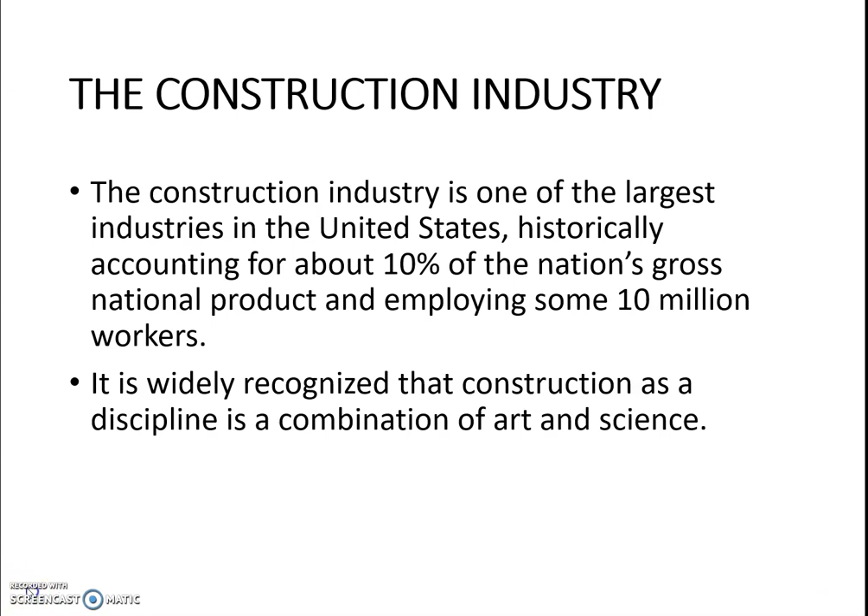So now let's talk about construction contractors. Companies and individuals engaged in the business of construction are commonly referred to as construction contractors because they operate under a contract arrangement with the owner.

Construction contractors may be classified as general contractors or specialty contractors. General contractors engage in a wide range of construction activities and execute most major construction projects. When they enter into a contract with an owner to provide complete construction services, they are called prime contractors.

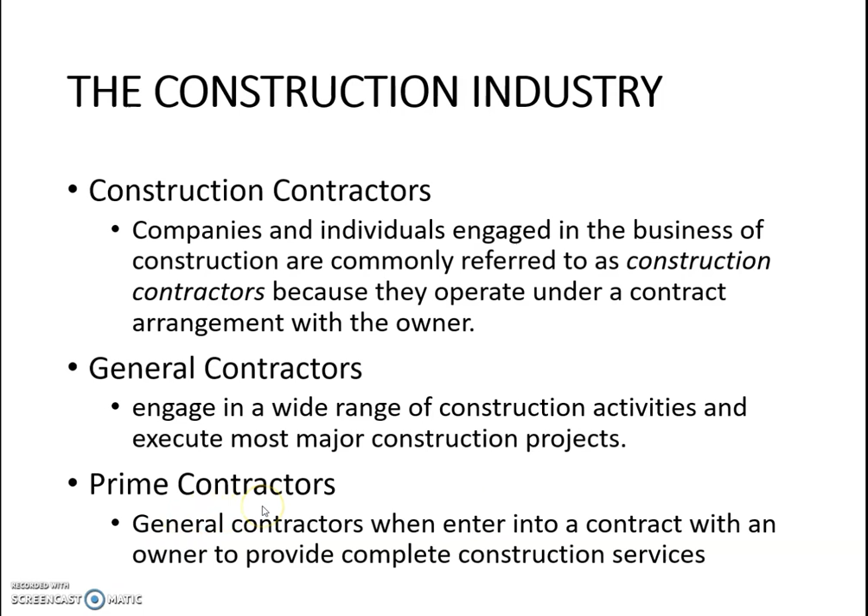Specialty contractors limit their activities to one or more construction specialties such as electrical work, plumbing, heating and ventilating, or earth moving. Specialty contractors are often employed by a prime contractor to accomplish some specific phase of a construction project. Since these specialty contractors are operating under subcontracts between themselves and the prime contractor, they are referred to as subcontractors.

Thus the terms subcontractor and prime contractor are defined by the contract arrangement involved, not by the work classification of the contractors themselves. This means that a specialty contractor employed by an owner to carry out a particular project might employ a general contractor to execute some phase of the project. In this situation, the specialty contractor becomes the prime contractor for the project, and the general contractor becomes the subcontractor.

The nature of the construction industry is such that there are a large number of small contractors in the industry. So many of the contractors in the industry are small in size.

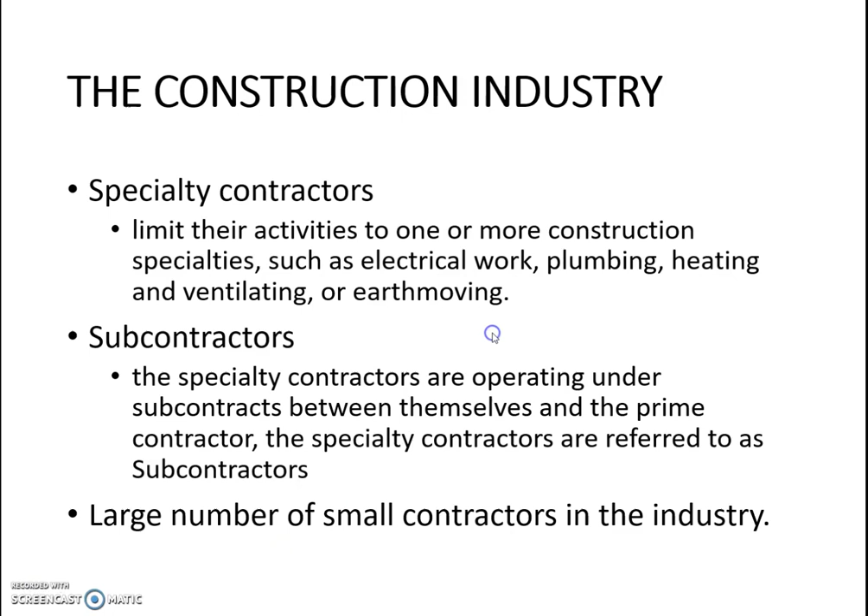Next we talk about the construction industry divisions. The major divisions of the construction industry consist of building construction, also called vertical construction, and heavy construction, which is also called horizontal construction.

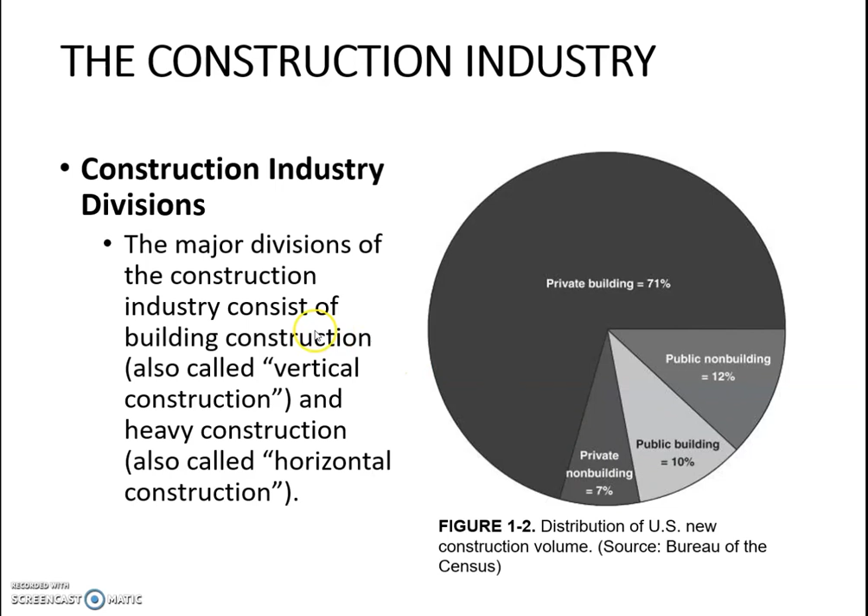So what are these building and non-building sectors? Building construction, as the name suggests, involves the construction of buildings. This category may be subdivided into public and private, as shown in the previous pie chart, with further subdivisions such as residential and non-residential buildings.

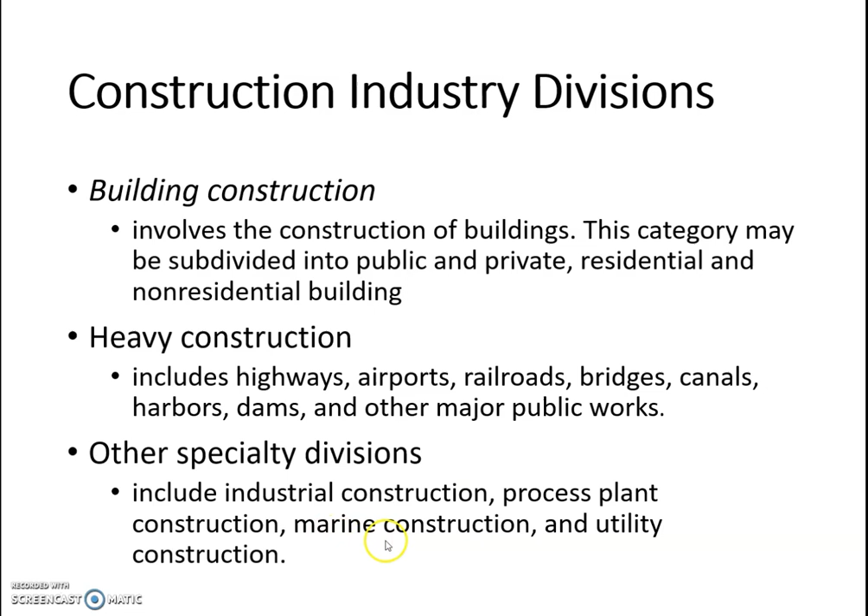In the non-building sector, we have the heavy construction and the other specialty divisions. Heavy construction includes highways, airports, railroads, bridges, canals, harbors, dams, and other major public works. Whereas the other specialty divisions include industrial construction, process plant construction, marine construction, and utility construction.

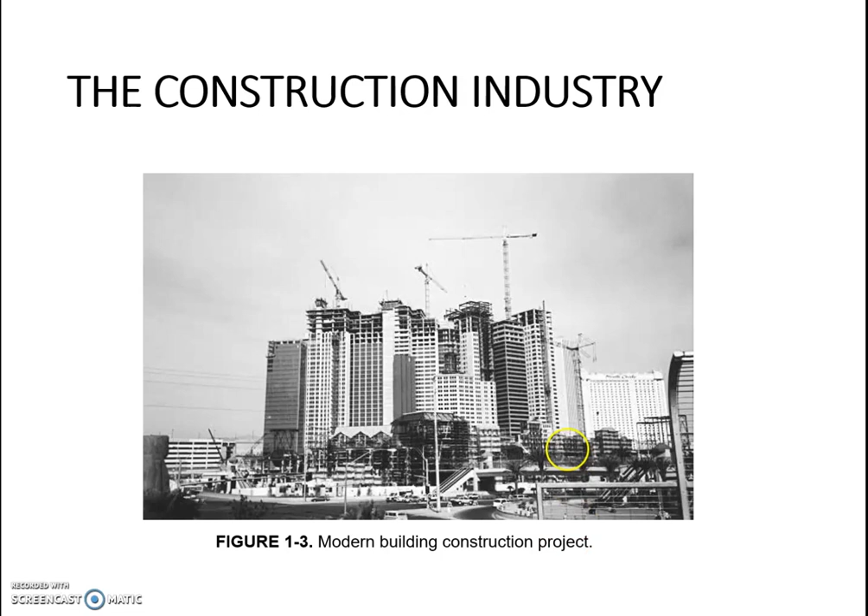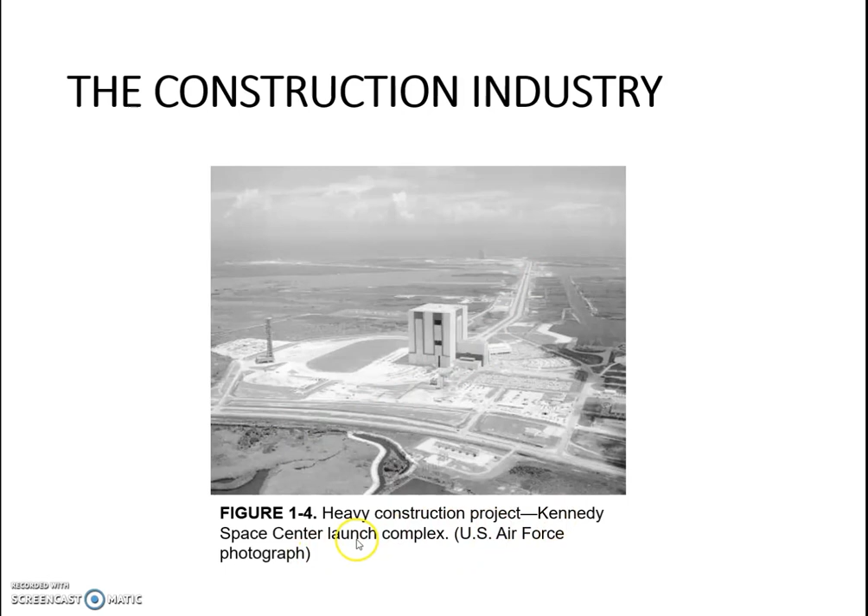Let's talk about the construction process, starting with project development and contract procedures. The major steps in the construction contracting procedure include bid solicitation, bid preparation, bid submission, contract award, and contract administration.

However, before the bidding process can take place, the owner must determine the requirements for the project and have the necessary plans, specifications, and other documents prepared. These activities make up the project development phase of construction.

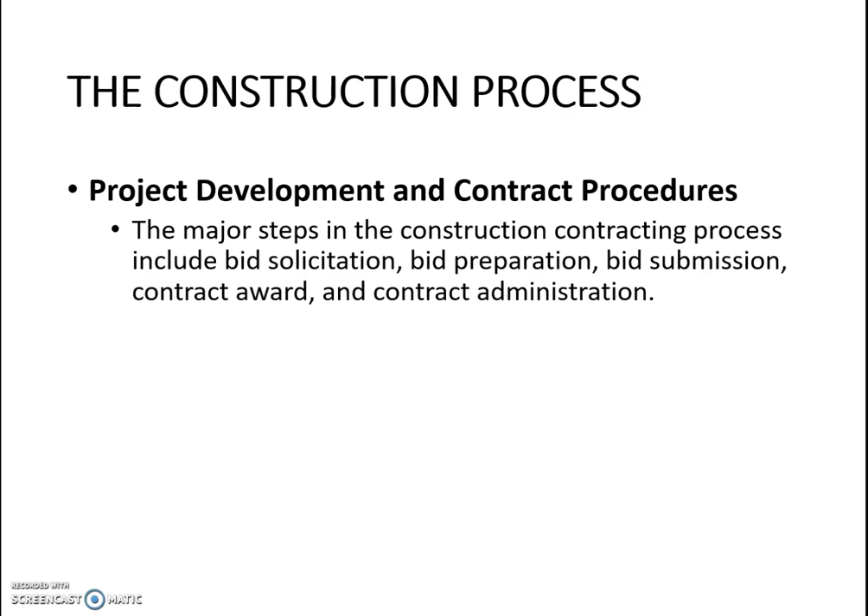For major projects, steps in the project development process include recognizing the need for the project, determining the technical and financial feasibility of the project, preparing detailed plans, specifications, and cost estimates for the project, and obtaining approval from regulatory agencies. This involves ascertaining compliance with zoning regulations, building codes, and environmental and other regulations.

On the other hand, for small projects, many of these steps may be accomplished on a very informal basis. However, for large or complex projects, this process may require years to complete.

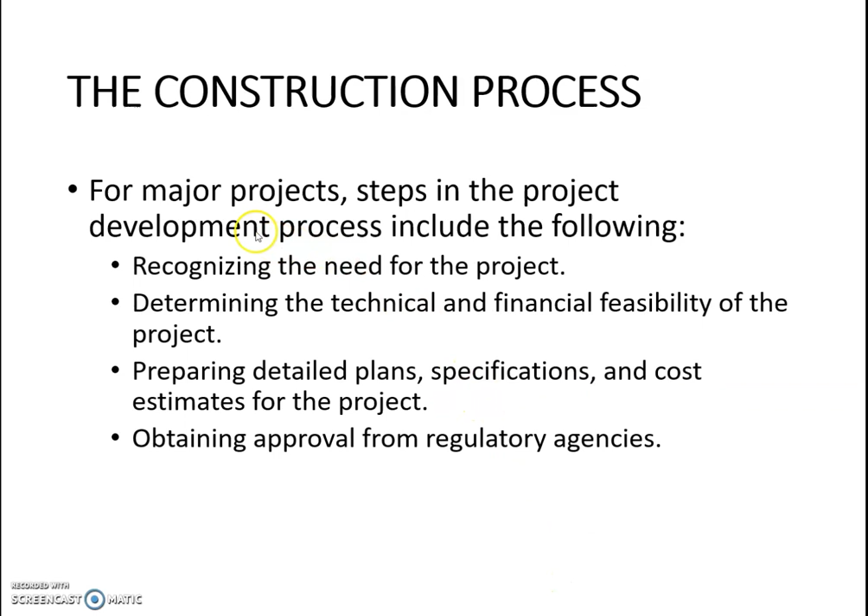Now let's see that after the development process, there is the construction. So how is this construction accomplished? The construction is accomplished based on several principal methods.

These methods are related to the situations when construction implies an owner construction force, then owner management of construction, construction by a general contractor, construction using a design build which is called a turnkey contract, and construction utilizing a construction management contract.

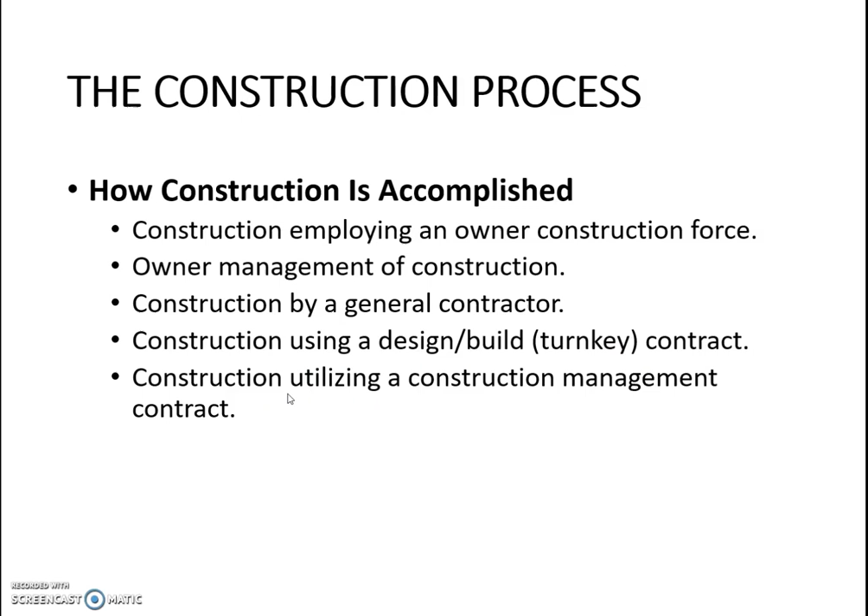Here we have some examples of these different methods. This is the one which is the construction implying the owner construction forces. In many large industrial organizations as well as a number of government agencies, they possess their own construction forces, and although these forces are utilized primarily for performing repair, maintenance and alteration works, they are often capable of undertaking new construction projects. This is how this system works as shown in figure 1.5.

More frequently, as shown in figure 1.6, owners utilize their construction staffs to manage their new construction. Here you have the construction staff, and under that we have the project director. So all of these are the owner's construction staff, and then they hire third parties to perform it.

In the first case, in figure 1.5, it is construction's own force which performs the work. But the only difference between figure 1.5 and figure 1.6 is that other parties are hired to perform the work in owner managed construction, whereas the work is performed by the owner's forces in this process.

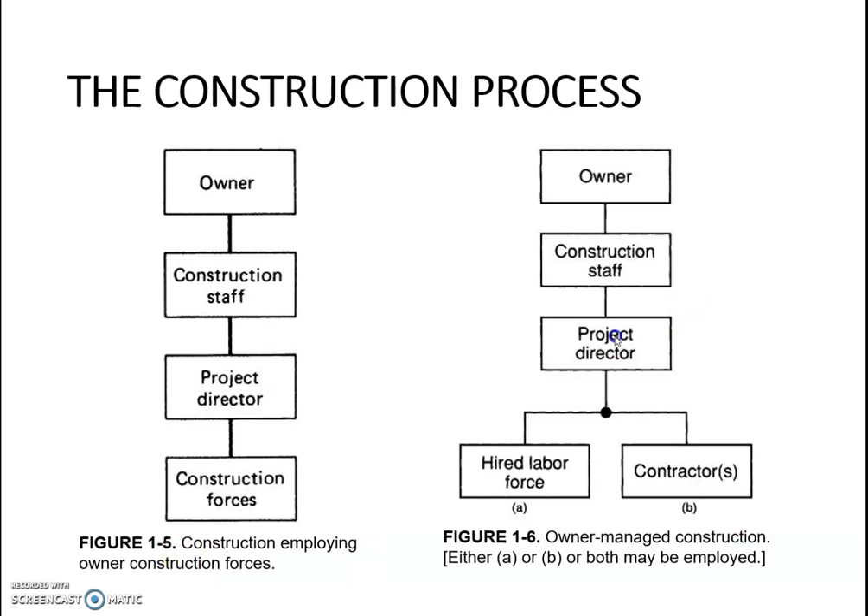There is another one, the construction by a general contractor. It operates under a prime contractor, and this prime contract is probably the most common method of having a facility constructed. So we have the owner, the owner has the contract with the design firm, the design firm inspects the work of the prime contractor, and the prime contractor hires several subcontractors, and in addition the contractor's own workforce also performs the work.

There are of course two newer methods of obtaining construction services, and these are finding increased use. These are called the design build method, or it is also called the turnkey method, and the other is called the construction management method.

Under this design-build or turnkey construction contract, an owner contracts with a firm to both design and build a facility meeting certain specified, usually performance-oriented requirements. Such contracts are frequently utilized by construction firms that specialize in a particular type of construction and possess standard designs which they modify to suit owners' needs. Since the same organization is both designing and building the facility, coordination problems are minimized and construction can begin before completion of final design.

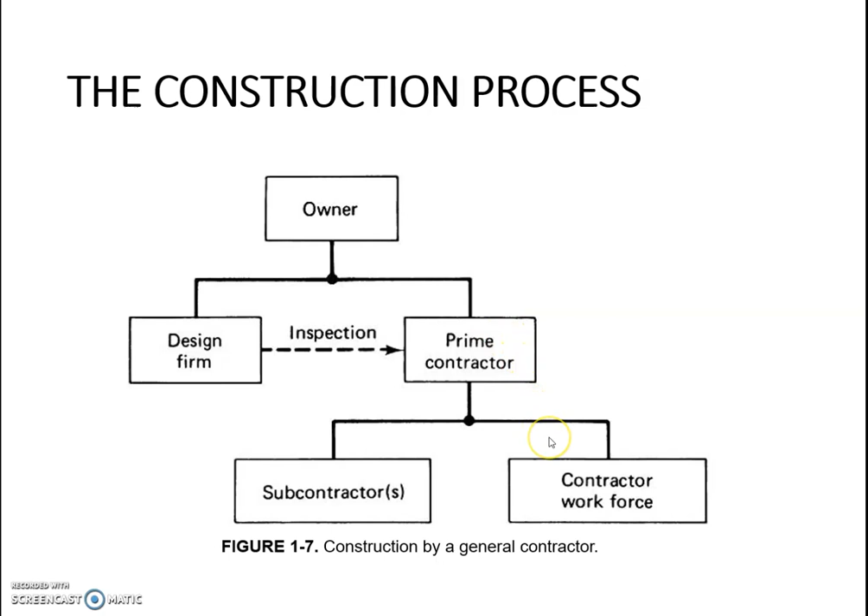Under the conventional construction process, it is also possible to begin construction before design has been completed. In this case, the construction contract is normally on a cost-reimbursable basis. This type of construction is referred to as fast track construction. Fast track construction and design-build construction are similar, but in fast track construction the arrangement of the parties is more like the traditional contractor arrangement. For example, construction by a general contractor performed so that design activity runs in parallel with construction activity is called fast track construction. However, in the design-build process, this is already included—design and construction take place in parallel with each other.

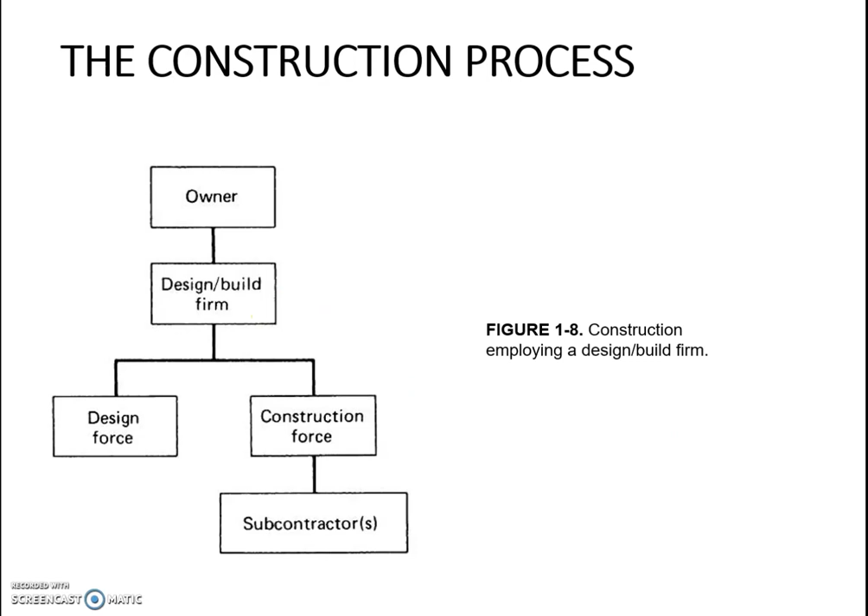In the last arrangement, construction of a facility utilizing a construction management contract is also somewhat different from the conventional construction process. Under the usual arrangement, also known as agency construction management, a professional construction manager acts as the owner's agent to direct both the design and construction of a facility. There are three separate contracts: one between the owner and the construction manager, one between the owner and the design firm, and one between the owner and the construction firm—three separate contracts for owner, design, construction, and construction management of the project.

This arrangement offers potential time and cost savings compared with the conventional procedure as a result of close coordination between design and construction. However, opponents of the method point out that the construction manager typically assumes little or no financial responsibility for the project, and that the cost of his or her services may be much higher than any savings resulting from improved coordination between design and construction.

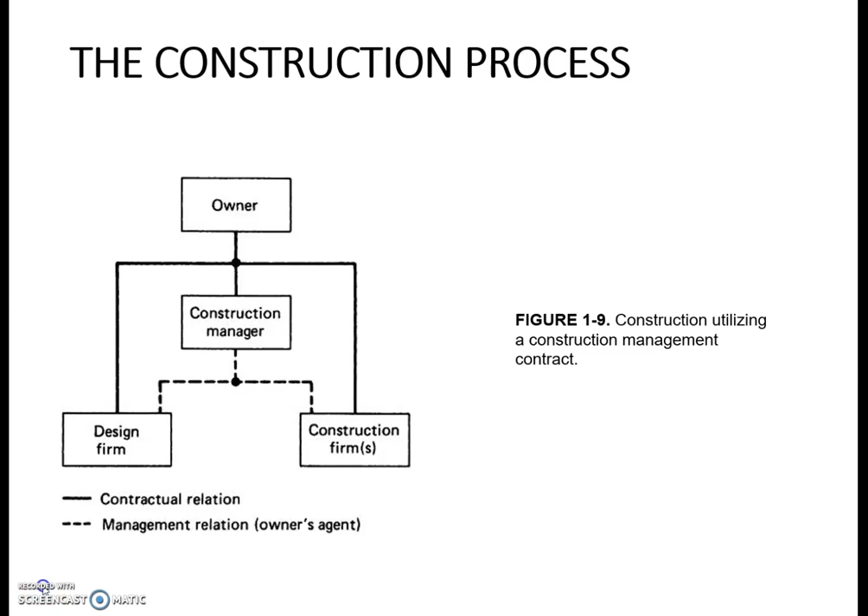Codes and regulations. Projects constructed in most areas of the United States or other countries must comply with a number of governmental regulations. These include building codes, zoning regulations, environmental regulations, and contractor licensing laws, among others.

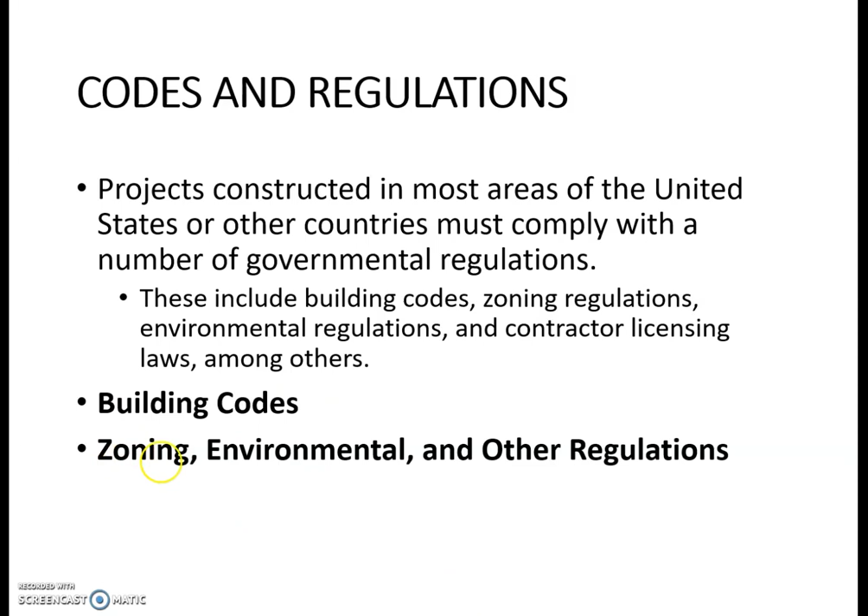Let's first discuss building codes and then zoning, environmental, and other regulations. Building codes are concerned primarily with public safety, providing minimum design and construction standards for structural and fire safety. As the name implies, such codes apply only to the construction of buildings.

In the United States, for example, there were initially three building codes: the Basic/National Building Code, the Uniform Building Code, and the Standard Building Code. Later, in 1994, these three model code groups jointly formed the International Code Council, which created the International Building Code. They also sometimes use the International Residential Code, which governs the construction of one- and two-family dwellings. In addition, there are plumbing codes, mechanical codes, and electrical codes by the International Code Council. However, for electrical purposes, the National Electrical Code, published by the National Fire Protection Association under the auspices of the American National Standards Institute, is mostly adopted.

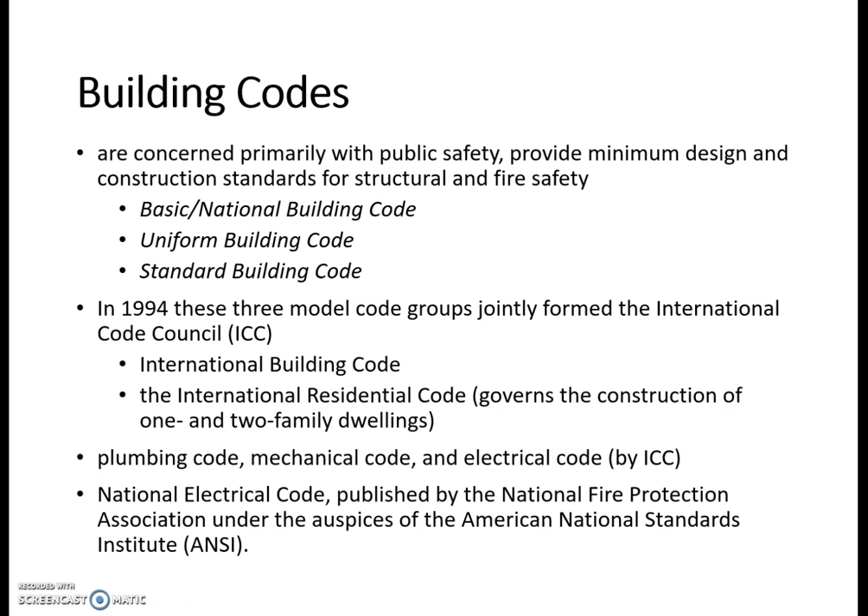Since the national model codes are purely advisory, a building code must be put into effect by local ordinance. While local building codes are usually based on the model codes, they often contain local modifications which may be unnecessarily restrictive. Such restrictions, along with delays in updating local codes, result in increased building costs. Another problem associated with building codes at the local level is the quality of code administration—the lack of an adequate number of technically qualified building officials often leads to cursory inspection using a checklist approach and discourages contractors from utilizing new materials and procedures.

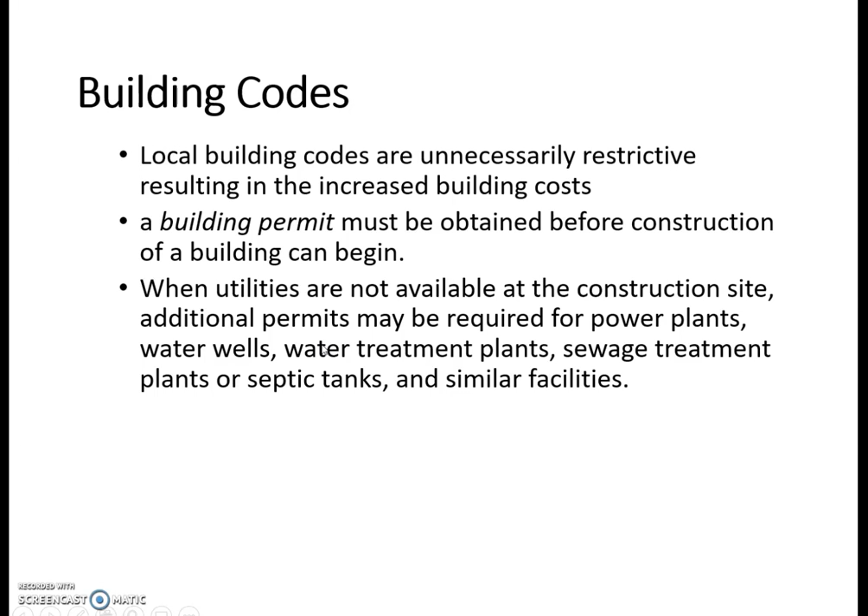In most cases, a building permit must be obtained before construction of a building can begin. After a permit is issued, the local building department will inspect the project at designated points during construction. The scheduling of these inspections may pose problems for the contractor and often results in construction delays. When utilities are not available at the construction site, additional permits may be required for power plants, water wells, water treatment plants, sewage treatment plants, or septic tanks and similar facilities.

Zoning, environmental, and other regulations. Zoning regulations, environmental regulations, safety regulations, labor laws, and others impact both building and heavy construction. Such regulations include zoning regulations, environmental regulations, etc.

Zoning regulations control the land use, limiting the size, type, and density of the structure that may be erected at a particular location. Some typical zoning classifications include commercial, residential with specific density, industrial, office, recreational, and agricultural.

Zoning classifications are normally designated by a combination of letters and numbers. As an example, the R4 zoning classification might represent residential housing, R for residential, with a maximum density of 4 units per acre.

In order to construct a facility not conforming to the current zoning, it would be necessary to obtain a change in zoning or an administrative exception.

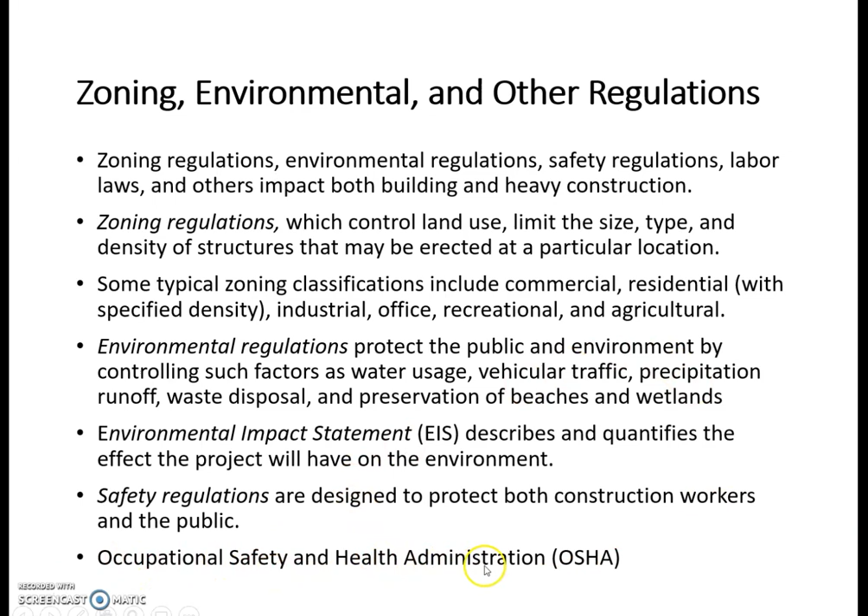Safety regulations are designed to protect both construction workers and the public. In the United States, there is an organization for overseeing the safety regulations, the Occupational Safety and Health Administration, normally called OSHA.

The construction profession is also regulated by a number of governmental licensing and certification procedures.

Communities having building departments usually require construction contractors to have their professional qualifications verified by licensing or certification. This may be done at the local level or by the state.

State certification or licensing often requires satisfactory completion of a comprehensive written examination plus proof of financial capacity and verification of character. A business or occupational license is also normally required of all contractors.

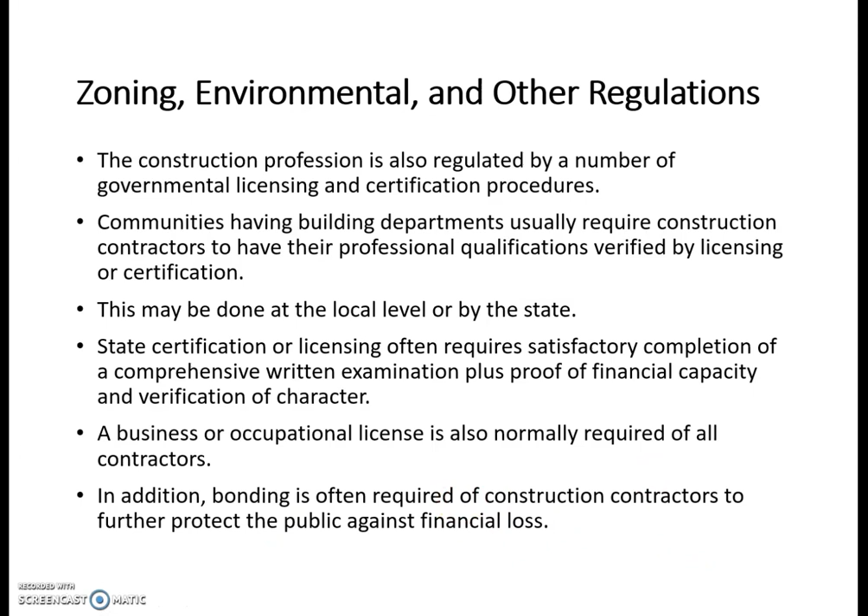In addition, bonding is often required for construction contractors to further protect the public against financial loss.

State of the industry: first, construction productivity, which is basically the output per labor hour. It has been generally found that the output per labor hour in the construction industry is gradually decreasing.

There is a report called the Construction Industry Cost Effectiveness Study. It suggests improvement in the areas of project management, labor training and utilization, and governmental regulation to improve construction productivity.

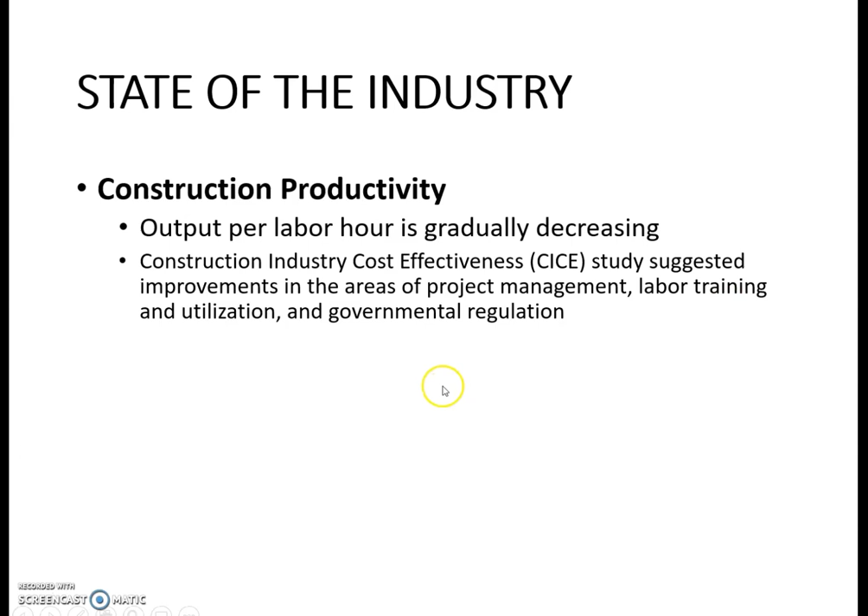One approach for improving productivity is to reduce construction costs. Some of the best opportunities for construction cost savings occur in the design process, even before construction begins.

Some design factors that can reduce construction cost include the use of modular dimensions, grouping plumbing and other equipment to minimize piping and conduit runs, incorporating prefabricated components and assemblies, utilizing economical materials (that means eliminating gold plating), and employing new technology.

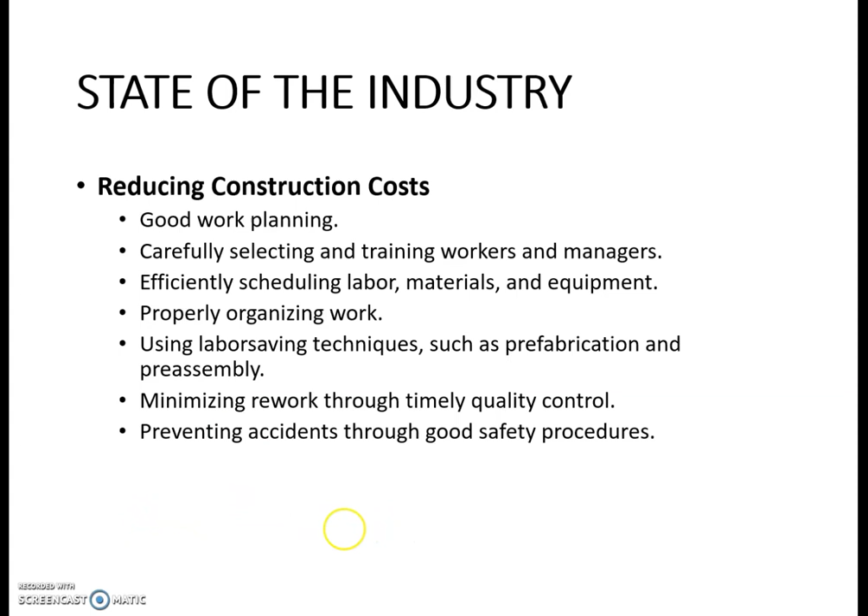There are some ways in which productivity can be increased and costs minimized during construction: good work planning, carefully selecting and training workers and managers, efficiently scheduling labor, materials, and equipment, properly organizing work, using labor-saving techniques such as prefabrication and pre-assembly, minimizing rework through timely quality control, and preventing accidents through good safety procedures.

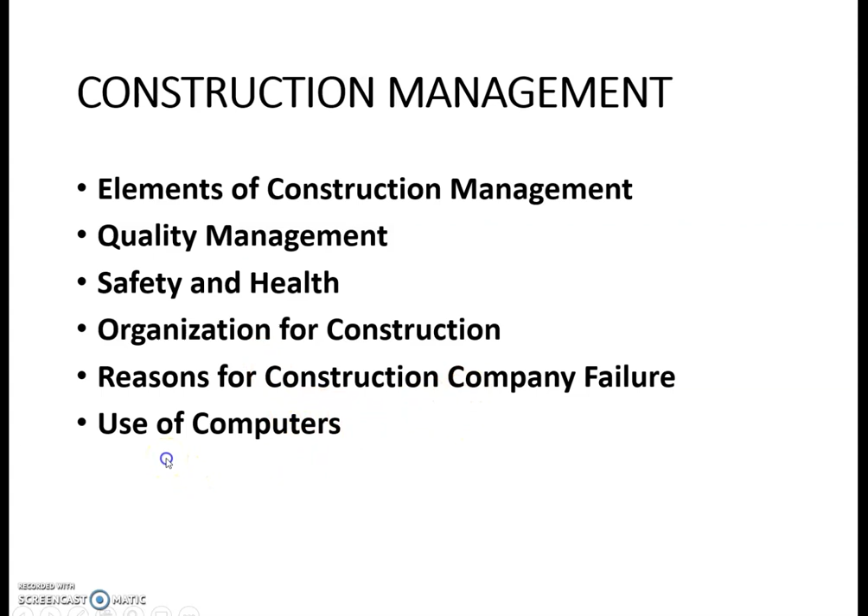Now let's look at some of the aspects of construction management: elements of construction management, quality management, safety and health, organization for construction, reasons for construction company failure, and use of computers.

The term construction management may sometimes be confusing; it has several meanings. It can refer to the contractual arrangement under which a firm supplies construction management services to an owner, or in its more common use, it refers to the act of managing the construction process.

The construction manager, on the other hand, is one who may be a contractor, project manager, superintendent, or one of their representatives. The construction manager manages the basic resources of construction.

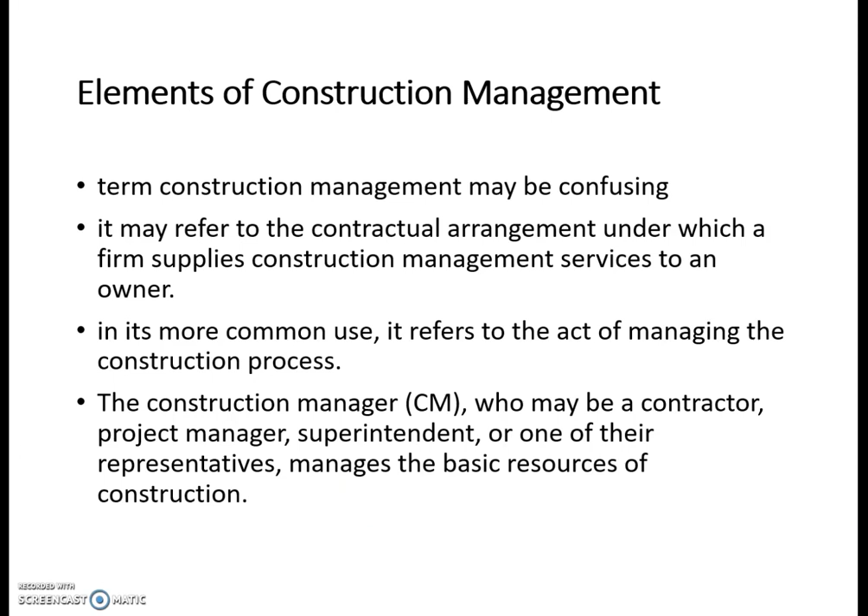So the resources include workers and subcontractors, equipment and construction plant, material, money, income, expenditures and cash flows, and time. Skillful construction management results in project completion on time and within budget. On the other hand, poor construction management often results in one or more of the following results.

These results may be project delays that increase labor and equipment cost and the cost of borrowed funds, high material costs caused by poor purchasing procedures, inefficient handling and/or loss, increased subcontractor cost and poor contractor-subcontractor relations, high insurance costs resulting from material and equipment loss or damage or a poor safety record, and low profit margin or loss on construction volume. Such poor project management policies, if long continued, will inevitably lead to contractor failure.

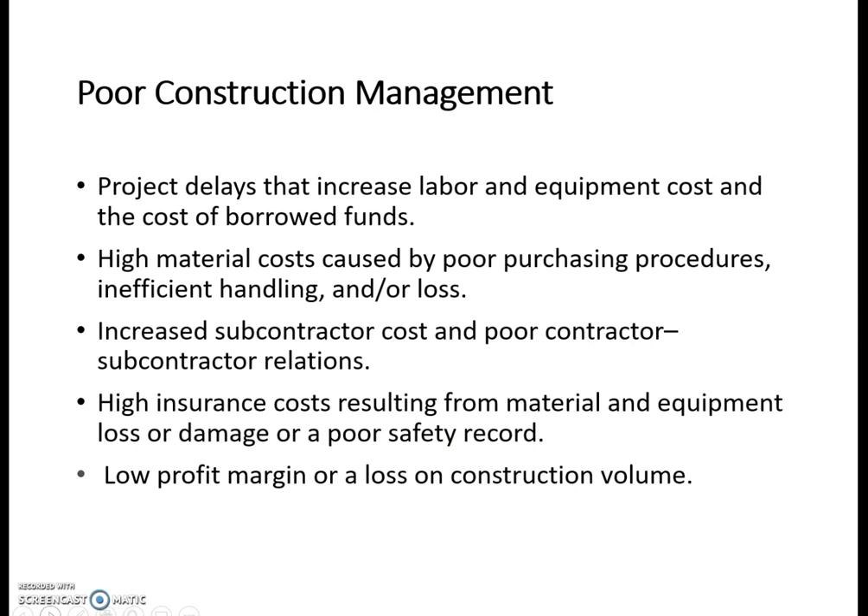Okay, next look at quality management. Quality management includes such activities as specification development, process control, product acceptance, laboratory and technician certification, training, and communication. Quality control, on the other hand, is a part of the quality management process and is primarily concerned with the process control function. Quality assurance inspections and tests performed by an owner's representative or government agency provide little more than spot checks to verify that some particular aspect of the project meets minimum standards.

Regardless of the procedures established, the construction contractor is primarily responsible for construction quality, including quality assurance inspections and tests performed by the owner's representative. Contractors should realize that the extra costs associated with rework are ultimately borne by the contractor, even on cost type contracts. Poor quality control will result in the contractor gaining a reputation for poor work, so the combined effect of increased cost and poor reputation often leads to construction company failure.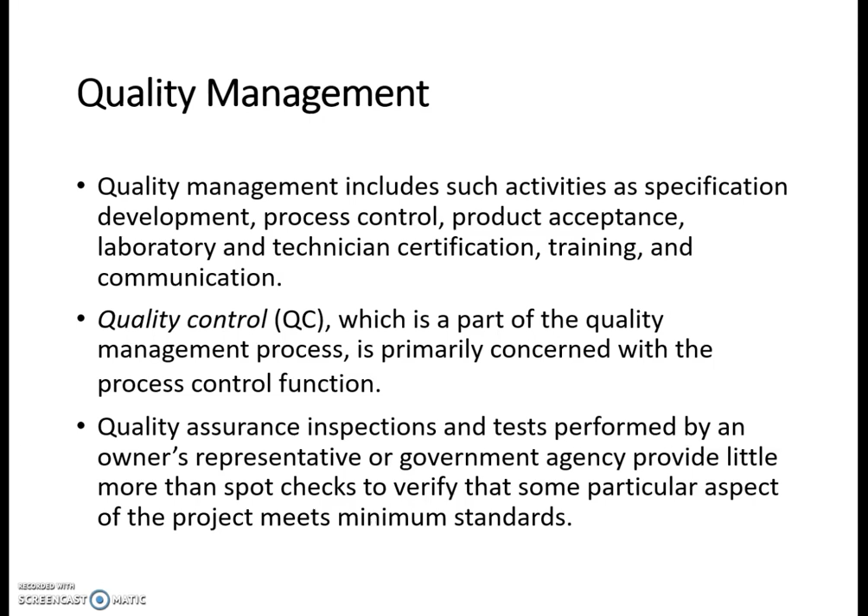There are results of virtually all construction processes and products which vary over some statistical distribution. Statistical methods can be used for the following purposes, while details such as procedures vary. In recent years, there has been an increasing use of statistics-based methods for quality assurance. So what is statistical quality management?

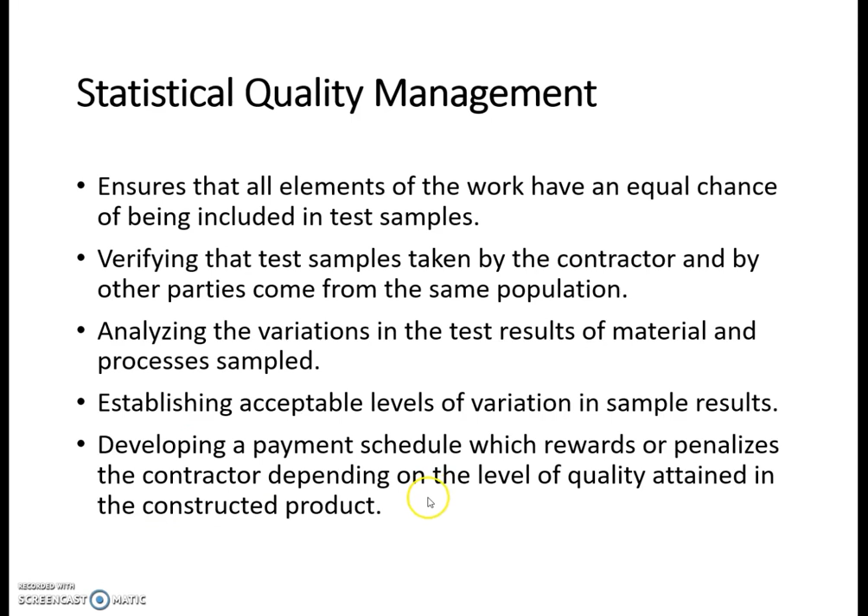It ensures that all elements of the work have an equal chance of being included in test samples. It verifies that test samples taken by the contractor and by other parties come from the same population. It analyzes the variations in the test results of materials and processes sampled. It establishes acceptable levels of variation in sample results, and develops a payment schedule that rewards or penalizes the contractor depending on the level of quality attained in the constructed product.

Construction is inherently a dangerous process. Historically, the construction industry has had one of the highest accident rates among all industries. In the United States, concern over the frequency and extent of industrial accidents and health hazards led to the passage of the Occupational Safety and Health Act of 1970, which established specific safety and health requirements for virtually all industries, including construction.

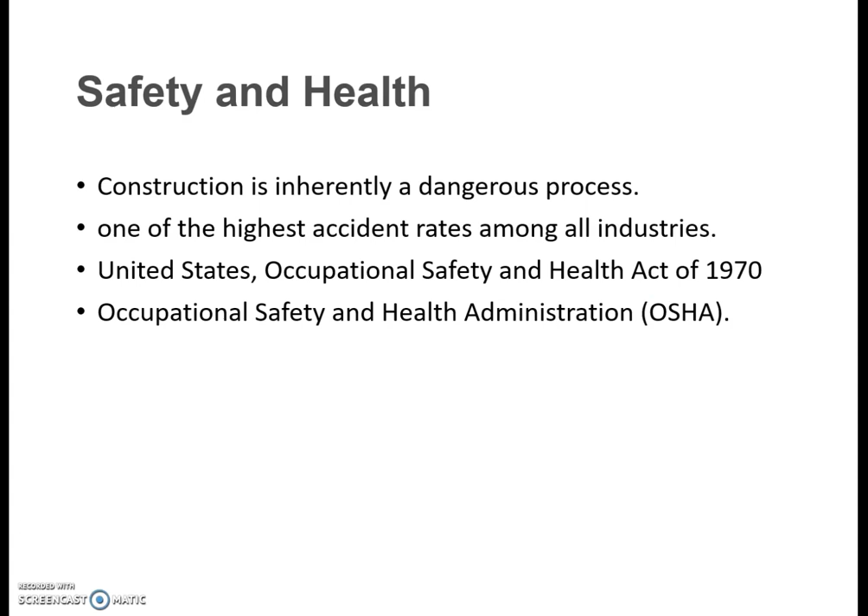This act is administered by the Occupational Safety and Health Administration. As a result, management concern has tended to focus on OSHA regulations and penalties. However, the financial impact of a poor safety record is often more serious than OSHA penalties. The following construction operations have been found to account for the majority of serious construction injuries.

Concrete construction, especially construction of formwork, placing concrete into formwork and failure of formwork during construction. The erection of prefabricated trusses, precast concrete elements, and structural steel. The construction and operation of temporary facilities including scaffolding, construction plants, lifts and storage facilities. Working from elevated positions resulting in falls, and construction equipment operations.

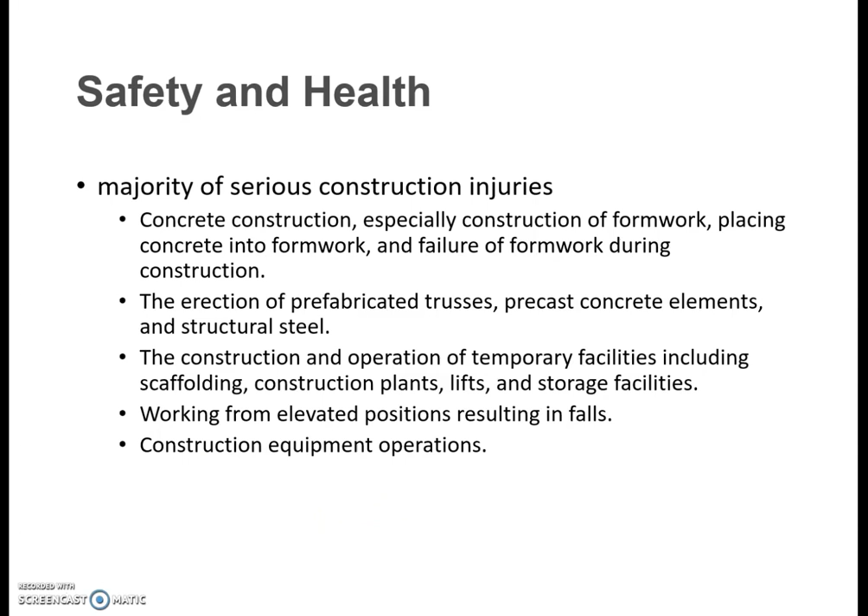Construction managers should give special attention to the control of safety hazards described above. In the area of worker health, the major environmental hazards likely to be encountered by construction workers consist of noise, dust, radiation, toxic materials, and extreme temperatures.

A typical construction company will have various departments such as administration, engineering, construction, and special staff, overseen by a CEO or president. Under each of these departments there will be different functions. For example, under engineering you may have functions such as design, estimating, planning, and scheduling. For construction, it may be overseen by a project manager. The special staff may include labor relations staff, legal counsel, and safety staff.

In the general administration, you may have accounting, general administration, payroll, public relations, and purchasing, etc. And then for the construction, which is directly related with the projects, you may have the business department, engineering department, equipment department, purchasing department staff, special staff department, and superintendent department.

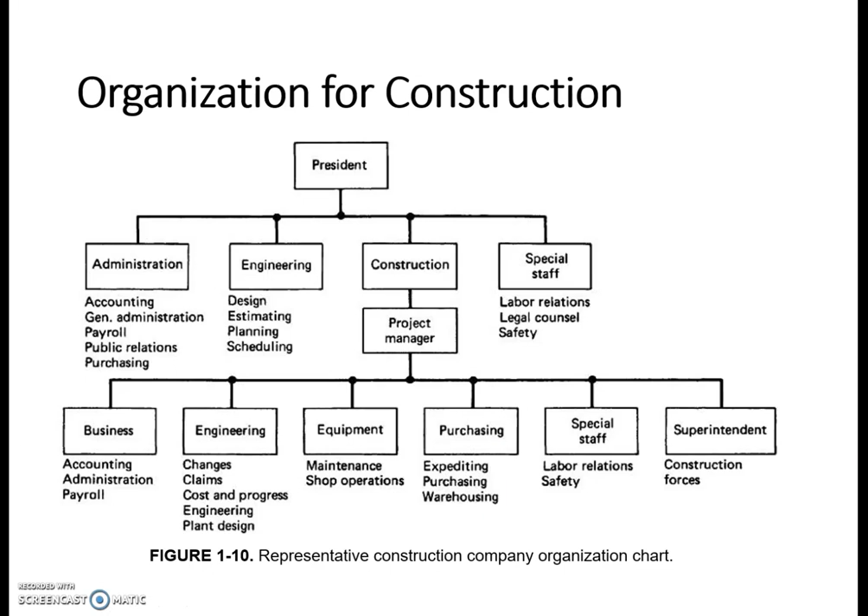Next, we can look at the reasons for construction company failure. There are several reasons, which may be the lack of capital, poor cost estimating, inadequate cost accounting, and lack of general management ability. All of these factors can be categorized as elements of poor management. So many studies have indicated that at least 90% of all construction company failures can be attributed to inadequate management.

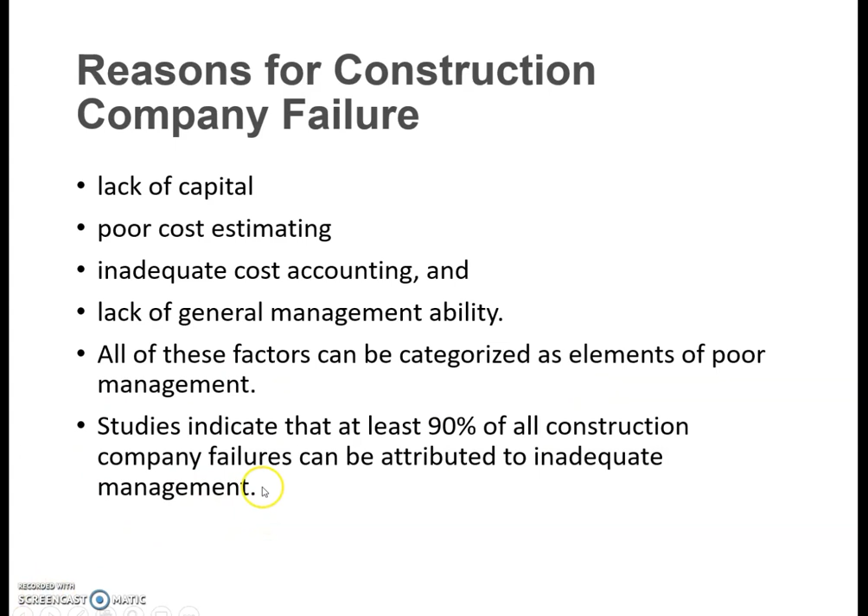Next is the use of computers. The wide availability and low cost of personal computers have placed these powerful tools at the disposal of every construction professional.

Construction applications of computers are almost unlimited. Examples of construction applications of personal computers are presented, and we can find there are many examples nowadays everywhere for the use of computers.

Perhaps the most exciting development in the construction application of computers is the wide availability of the internet with its almost unlimited resources, along with electronic mail, email services.

As an example, equipment manufacturers are increasingly engaging in electronic communication with dealers, and dealers with contractors. Contractors exchange information and data among projects and between projects, sites, and the home office. Manufacturers are also providing online parts catalogs, as well as service and repair bulletins to dealers.

Equipment warranty service requests are also being electronically processed. So while some manufacturers' information is available only to dealers and not to contractors, increasingly such data and services will become available to contractors.

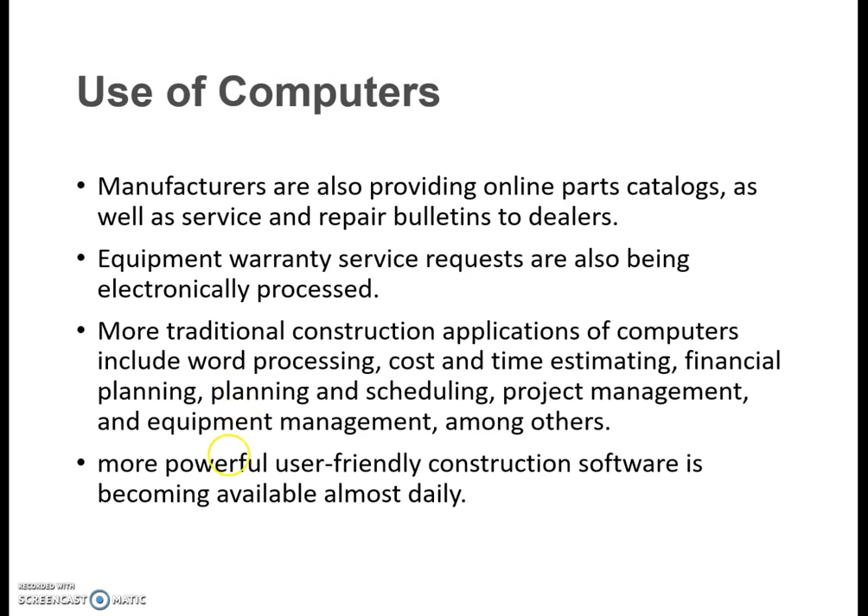More traditional construction applications of computers include word processing, cost and time estimating, financial planning, planning and scheduling, project management, and equipment management, among others. With the increasing power and declining costs of computers, more powerful user-friendly construction software is becoming available almost daily.

Construction trends: some of the major trends noted in the construction industry in recent years include increasing international competition, rapid changes in technology, the wide availability of information via the internet, increasing speed and ease of communication, and increasing governmental regulations of industry, particularly in the area of safety and environmental protection.

As a result of these developments, the larger well-managed construction firms are capturing an increasing share of the total construction market. These trends, along with the increasing use of computers for design and management, have created a growing demand for technically competent and innovative construction managers. With the increasing automation of construction equipment has come an increasing demand for highly skilled equipment operators and technicians.

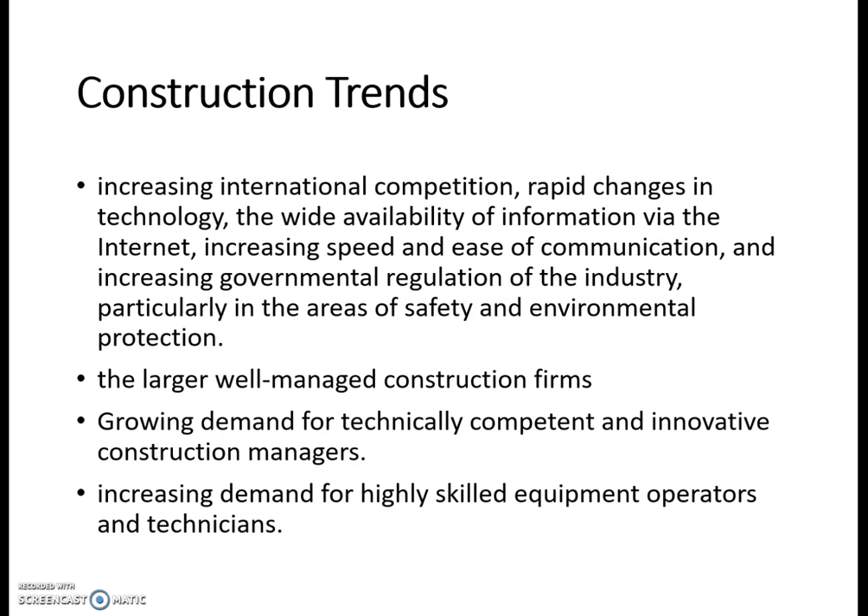So there are new forms of construction organization and management. When the demand for construction again peaks, it is probable that new forms of construction organization and management, as well as new construction methods, will have to be developed to meet these demands.

In any event, the construction industry will continue to provide many opportunities and rewards to the innovative, professionally competent, and conscientious construction professional. So in summary, the future of construction appears as dynamic as does its past. An abundance of problems, challenges, opportunities, and rewards wait for those who choose to enter the construction industry.